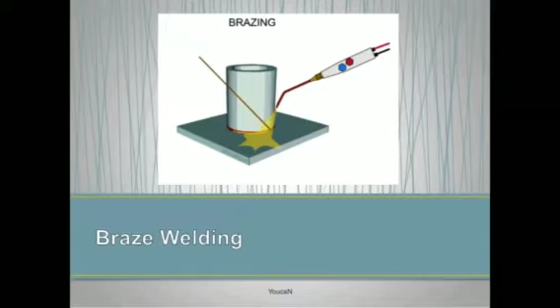So today our topic is brazing. Let us move to our topic. In our earlier class, we discussed soldering. So what is meant by braze welding? This is the brazing diagram, the braze welding outline diagram. In depth we will move for brazing.

Soldering means we are having below 427 degrees. So already we have started with our earlier class on the same topic. For braze welding, the filler metal melting point: in soldering, the filler metal melting point is below 427 degrees centigrade, whereas for brazing, filler metal melting point is above 427 degrees centigrade. The filler metal distribution in the joint is only by capillary attraction. This is the main working principle of our brazing.

The filler metal distribution in the joint is only by capillary attraction. So it differs from conventional brazing as compared to the other one. In conventional brazing, a much wider gap is filled with brazing brass with the help of a torch. Here, capillary action plays no part in making the joint.

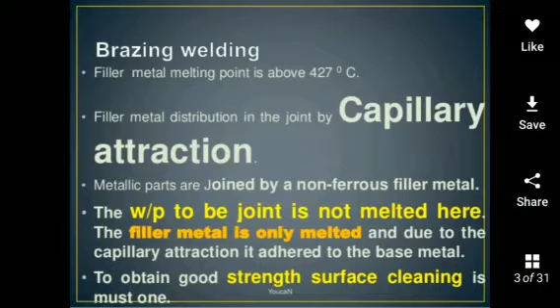The method is particularly useful for repairing cast iron castings, and the straight welding of the casting requires complete preheating, which is not always desirable or feasible. The brasses and bronzes we have taken have greater strength and ductility than cast iron.

This is the actual hand torch brazing. It forms a strong and satisfactory bond with the base metal. Since the base metal is not fused or highly heated, internal stresses are kept to a minimum and cracking is not likely upon cooling.

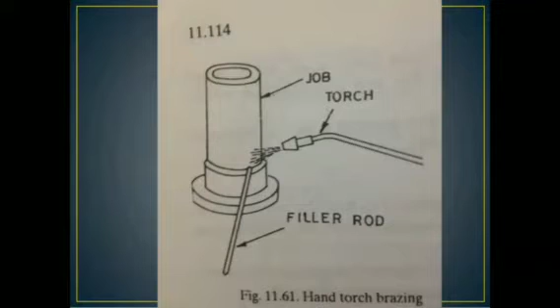Coming to silver brazing, this is the outline diagram of brazing. Silver brazing, often referred to as silver soldering or hard soldering, is more expensive than plain soldering because the filler metal is more expensive.

The method is preferred where a superior joint is needed and where the quantity of filler metal required is small. It is very popular in small area repair work and is used widely in the electrical and refrigeration industries.

On screen we have shared a flux. What about the flux? Flux is a chemical compound applied to the joint surfaces before brazing. Its use is essential in the brazing process, with a few exceptions noted later.

The reason we use this is that heating a metal surface accelerates the formation of oxides, which result from the chemical combination between the hot metal and the oxygen in the air.

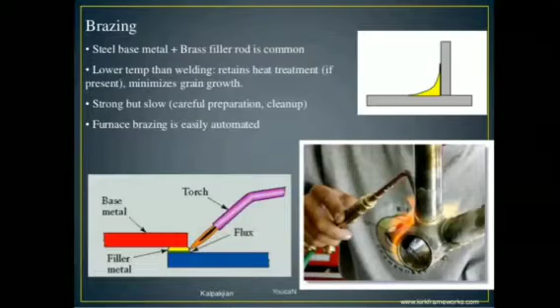Coming to brazing: the base metal is steel, and the base metal plus brass filler rod is common. The second important point is lower temperature than welding, that is above 427 degrees centigrade.

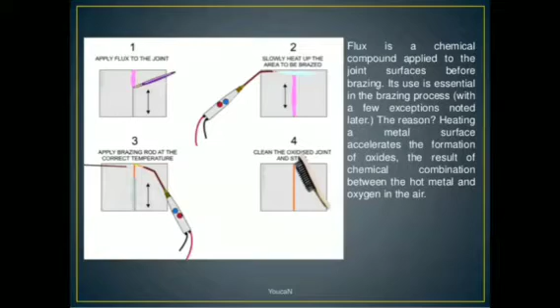Retaining heat treatment, if present, minimizes grain growth. The joint is very strong, but the capillary action is slow. Therefore careful preparation and cleanup must be done using flux, a chemical compound applied to the joint surfaces before brazing. That is nothing but the cleanup operation.

The last important point in brazing is that furnace brazing is easily automated. This is the diagram: flux, torch, base metal, and filler metal. The yellowish color we see in the diagram is filler metal, and the reddish color is base metal. What is the base metal we have taken here? Steel. And the blue is the other metal.

So two different metals have to be joined. The flux is added on the surface of the base metal, and the torch gives the temperature so that the gap reaches above 427 degrees centigrade. Therefore the melting point may be achieved, since the melting point of the filler metal is above 427 degrees centigrade.

With that low temperature we can get a strong joint, but it is very time-consuming compared to soldering or other welding processes. Furnace brazing is easily automated.

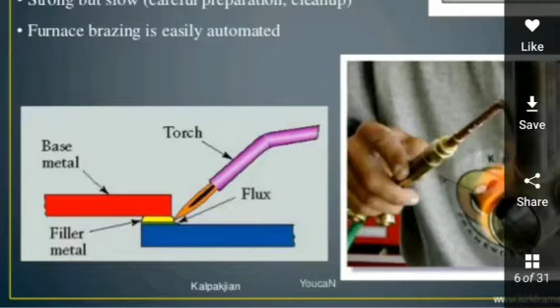Coming to the types of brazing: torch, furnace, dip, and induction. These are the types of brazing - torch brazing, furnace brazing.

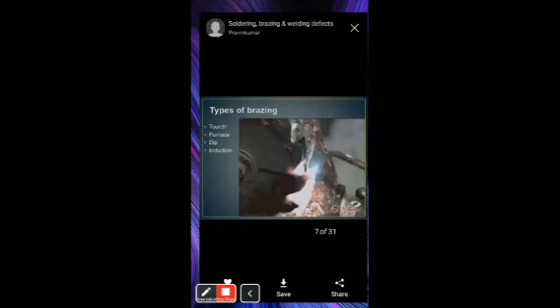Right, so coming to this, these are the types. So this is the brazing. Base metal is steel and brass is the filler rod metal.

So whenever soldering, what is the filler metal? Lead and tin. According to brazing, the base metal is steel, as the melting temperature is above 427 degrees centigrade.

So at that temperature, we can make the brazing joint. Before coming to this, here you can observe the diagram. So what is going on here? This is one metal and this is the base metal, the upper one, and this is the torch.

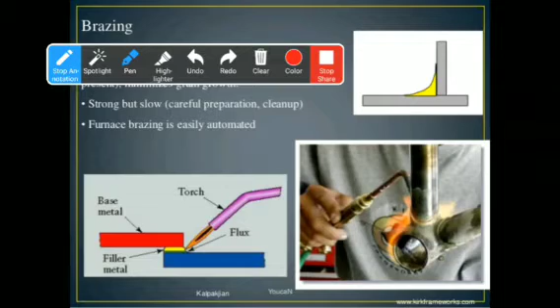Here we are adding flux, and the yellow color one is the filler metal. So the metal may be melted to some extent, and therefore it may be fused together and the joint may be formed, as compared to other welding processes. It is a slow process, but certain care must be taken for this process.

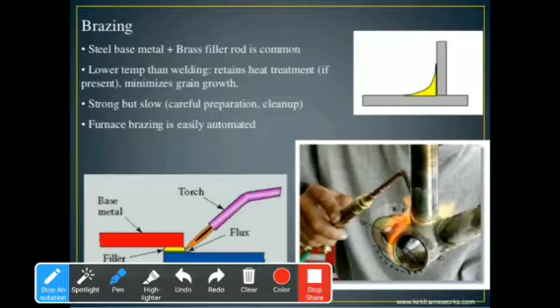So coming to the types of brazing: one is torch brazing, second one is furnace brazing, third one is dip brazing, and fourth one is induction brazing. These are the types of brazing.

Everybody must just remember that anytime in our welding process, brazing and soldering is a very important topic. Anytime in this welding process, either oxyacetylene welding or this type of soldering, these codes are very, very important. If any questions are asked, all of you just prepare yourself using this PPT shared.

So coming to the types of brazing, the picture is loading, just wait a minute. The net is very slow today.

Yeah, so right, so braze welding. This is the braze welding for metal. And boric acid, chlorides, fluoxides are some of the fluxes we have been adding. Why are we adding? To clean up the surface of the base metal.

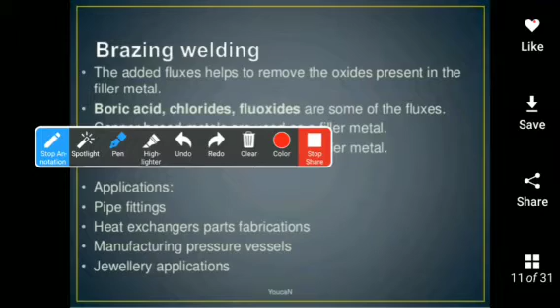So brazing applications - all of you, any mechanical engineer must know about the applications. These are the applications on screen we have shared. One is pipe fittings, second one is heat exchangers, parts of fabrications, and third one is manufacturing pressure vessels.

It is very slow. So this is the applications.

So brazing welding: first one is it is at low temperature, a low temperature process; second one, dismantling of joints is possible; it is a quick and clean action; and the last one, smooth surface finish can be obtained. So these are not the applications, these are the advantages. Every process must contain construction, working principle, advantages and disadvantages.

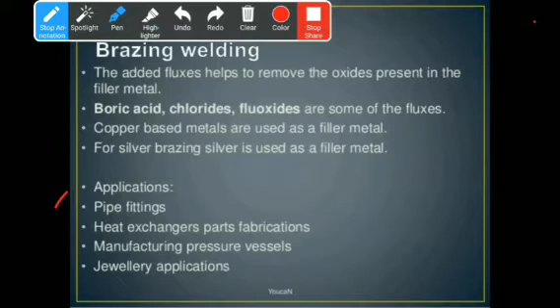So coming to that, applications are pipe joints and others. These are all the applications we have shared. Total 4 applications of brazing, whereas for this we have a total of 4 advantages also.

One is low temperature process, and second one is dismantling of joints is possible - that is, cutting operation is also possible using this braze welding. Third one is quick and clean operation, and fourth one is smooth surface finish can be obtained.

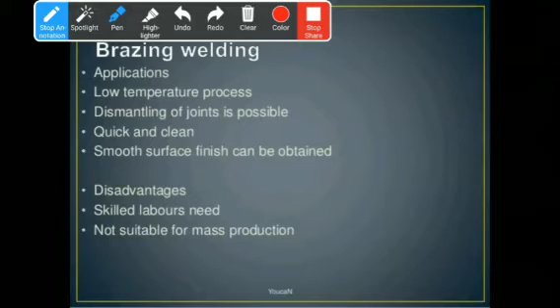So coming to the disadvantages: skilled laborers must be required, a skilled worker, skilled operator must be required. And the next one is not suitable for mass production - a number of products cannot be joined using this brazing; it's a very slow process.

So coming to this is the soldering. Here you can observe, this is the soldering, this is the solder, this is the wire form of lead and tin, filler metal.

It gives the temperature below 427 degrees, therefore here the filler metal may be melted and the joint may be formed here. Soldering means it will create a narrow joint also, that means it will create the temperature up to the lower surfaces of the workpiece.

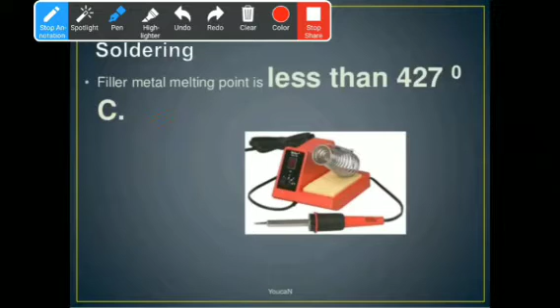So this is the soldering. We can observe it in our ECE lab or mechanical labs also. Filler material melting point is less than 427 degrees.

So this is the solder filler metal alloys, already we have discussed this. One more time I am sharing this: alloys of tin and lead. So alloys of tin means it may be subdivided into silver, bismuth and lead. The melting point is below 430 degrees centigrade.

So here the flux used to clean the joint and prevent oxidation - zinc chloride, mixtures of zinc chloride and ammonium chloride.

Coming to the applications: printed circuit board manufacturing. Wherever the ECE labs are, you can observe the soldering. Second one is pipe joining, specifically copper pipe joining, where the material of that particular pipe is copper. Third one is jewelry manufacturing.

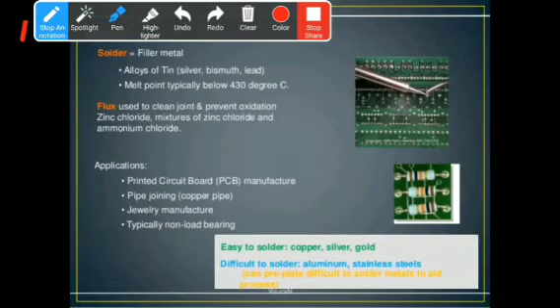Fourth one is typically non-load bearing. Here it is easy to solder, meaning the base materials may be copper, silver, and gold. Difficult to solder materials, where we have certain difficulties, are aluminum and stainless steel. Whereas for brazing, stainless steel is the base metal, for soldering, stainless steel is a difficult material to join.

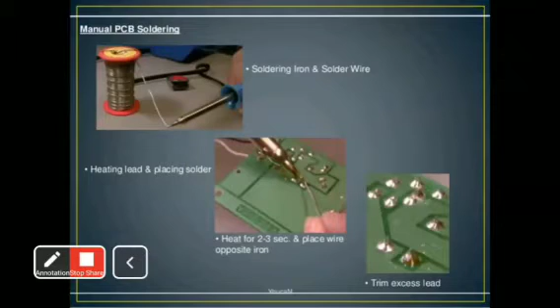Coming to manual PCB soldering: soldering iron and soldering wire, you can observe here. This is the soldering iron and this is the soldering wire.

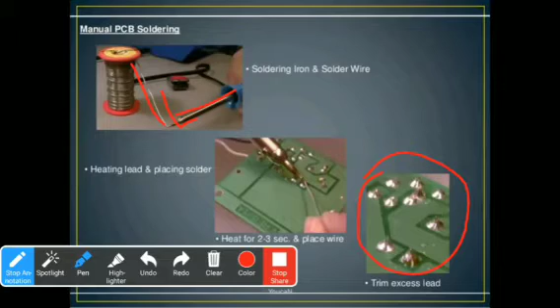Coming to the difference between brazing and soldering.

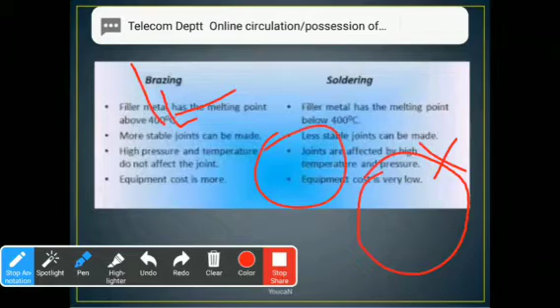Filler metal has the melting point above 400 degrees, 327 degrees.

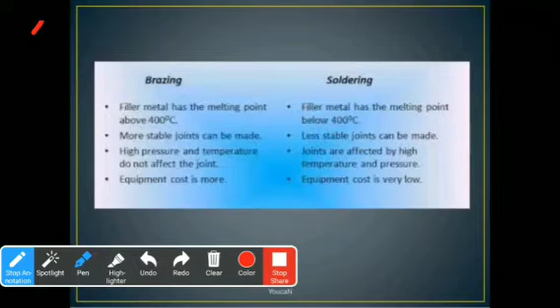So these are the main classifications in brazing and soldering. Coming to the defects: one is cracks, second one is cavities - these are all the defects in our brazing and soldering.

Coming to the defects: one is cracks, second one is cavities, third one is solid inclusions, fourth one is imperfect shape or unacceptable contour, next one is incomplete fusion, and another is miscellaneous defects. These are all the welding defects that may be obtained by improper soldering and brazing.

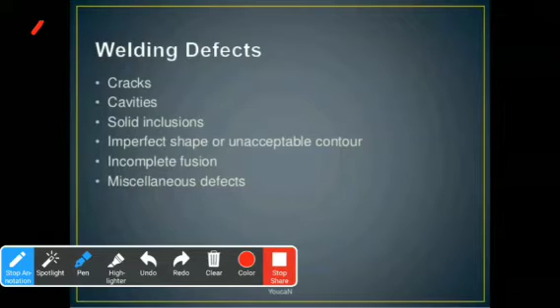To avoid all these things, we can manage. Coming to distortion from the welding process: one is transverse shrinkage in butt weld, second one is longitudinal shrinkage in butt weld, third one is angular distortion in butt weld, and fourth one is angular distortion in fillet welds.

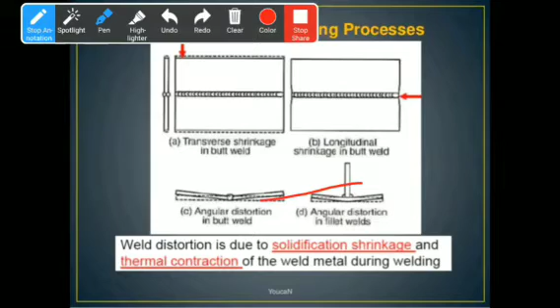Weld distortion is due to solidification shrinkage and thermal contraction of the weld metal during welding. All of you should just know about the different types of distortion from the welding process. This is the angular distortion.

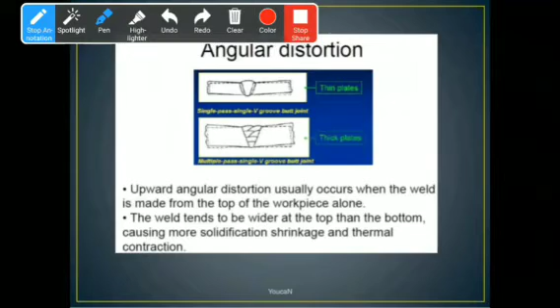Upward angular distortion usually occurs when the weld is made from the top of the workpiece alone, and the weld tends to be wider at the top than the bottom, causing more solidification shrinkage and thermal contraction. This is reduced by reducing the volume of weld metal, and by using single pass deep penetration welding - the diagram itself can be drawn, as it is drawn in machine drawing also.

To avoid this - these are the causes we are attaining the defect - whenever we require defect-free welding, we will provide a certain atmosphere for that. Prevention: how to prevent this defect is to set the machine on scrap metal and clean metal before welding. Clean metal means removing rust, whatever surfaces may be created.

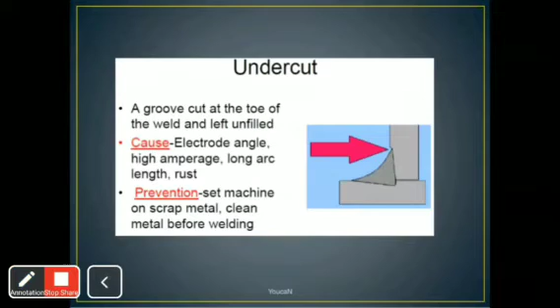So prevention: set machine on scrap metal, clean metal before welding. Coming to this, insufficient fill is one of the defects we attain.

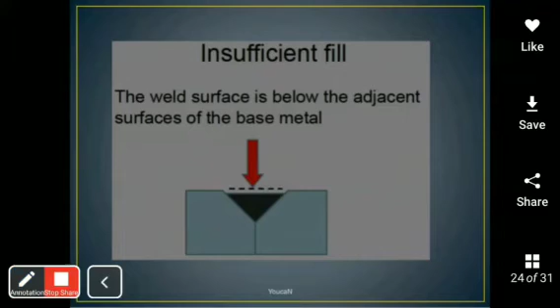All these defects may be discussed in our casting also. The weld surface is below the adjacent surfaces of the base metal. This is one of the defects - insufficient fill.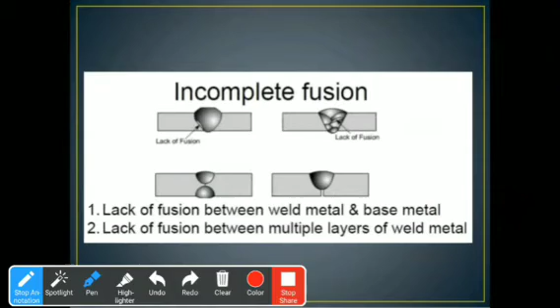Lack of fusion between weld metal and base metal, and lack of fusion between multiple layers of the weld metal - these are the two reasons for attaining this incomplete fusion. This is the cause.

Weld metal does not form a cohesive bond with the base metal. Cause is low amperage, steep electrode angles, fast travel speed of the wire, and lack of preheat, etc. So how to prevent this - eliminate potential causes.

The repair means remove and re-weld. Repair means how to repair this - prevention and repair. So therefore prevention is elimination, complete removing of potential causes, and repairing means removing and rewelding. This is about incomplete fusion.

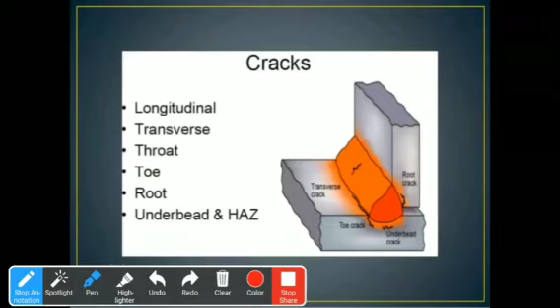So these are the cracks we are attaining: longitudinal, transverse, throat, toe, root, underbead, and HAZ. All of you just have a look at it. This one is the crack.

Second one is transverse, in this way. Third one is throat. This is throat or root, both are same. This is the throat.

Second one is underbead crack and HAZ, because this crack is mainly attained by improper cleaning. The toe means at the end point - at the end point we will attain it. These are the different types of cracks.

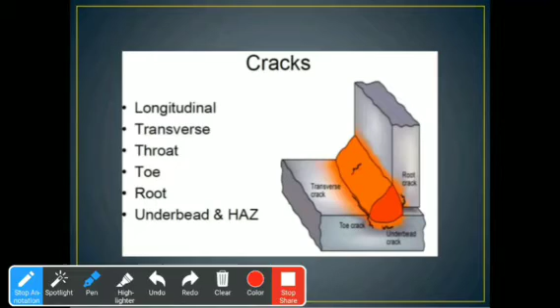These are attained by improper soldering and brazing. So weld profile in arc welding: this one is the desired profile for a single V groove weld joint. Second one is undercut - portion of base metal melted away.

Third one is underfill - depression in weld below adjacent base metal surface. Fourth one is overlap - weld metal spills beyond the joint onto the part surface, but no fusion occurs.

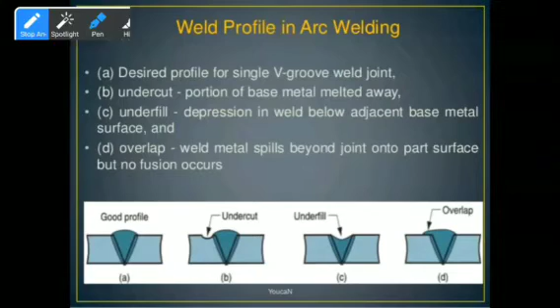So these are the weld defects we will attain: one is crack - internal crack, second is inclusions, and third is underfill. That means it is not filling the total gap.

So second one is porosity, overlap, undercut, and lack of penetration. The third one is the correct weld. These two are not correct - this is the correct weld.

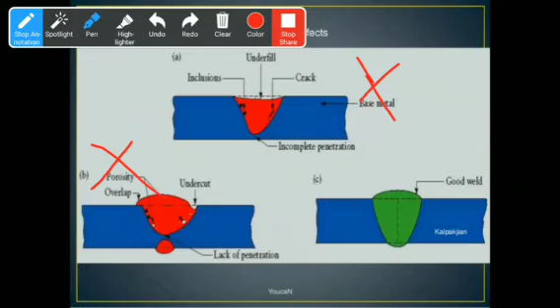So why it is attaining incomplete penetration first, and second is lack of penetration. To avoid this, the measures we have to take, we have already discussed.

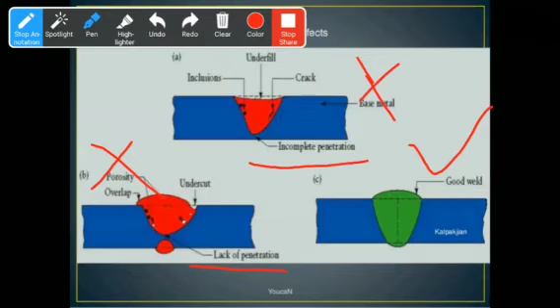So this is the good weld, right? This is the welding flaws. Incomplete penetration - not enough heat may be produced, so this is not enough, this is okay, and this one is too much.

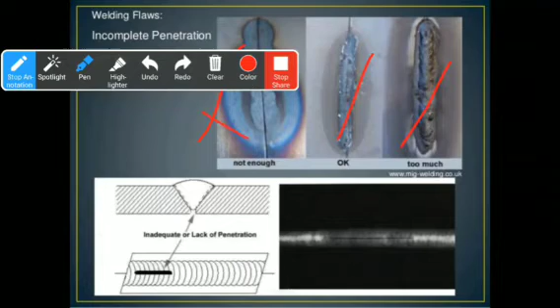That means overflow of filler metal may be melted and flowed onto the base metal. So what is the right procedure? Not enough is not correct. Too much is also not correct.

So this is the right one - that means correct bead position may be obtained. So inadequate or lack of penetration we will attain in this way.

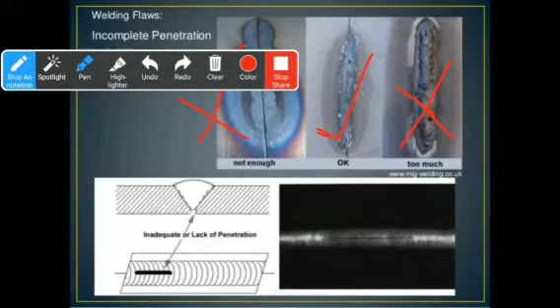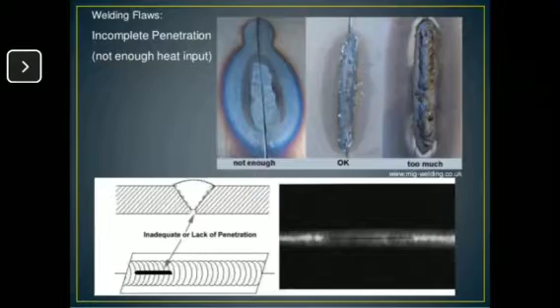So coming to the welding process, brazing and soldering. Coming to the next one, we are having the next one - resistance welding.

Coming to this, here this is the resistance welding. This is the resistance welding.

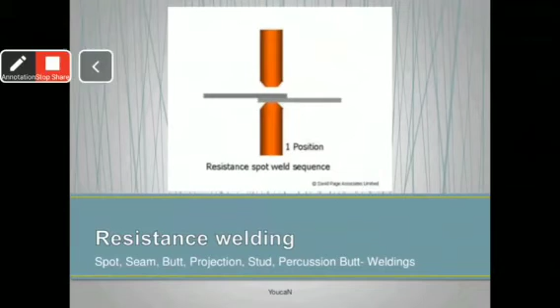The two pieces - the same equipment is used for resistance welding also, excepting the filler material is placed in the joint. That's why I'm sharing resistance welding at the same point here.

Coming to the different types of brazing methods, we have totally 4 types: torch brazing, furnace brazing, dip brazing, and resistance brazing. So resistance brazing is nothing but resistance welding.

So this is the position of the resistance spot welding process. Here the same equipment is used for resistance welding. What is the equipment? Brazing equipment, excepting the filler metal is placed in the joint. The filler metal is placed in the joint, so rapid heating minimizes oxidization.

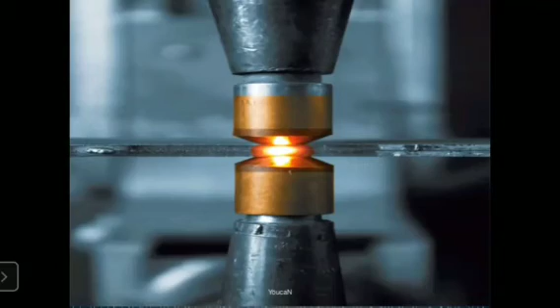Rapid heating minimizes oxidization, and the heat affected zone, HAZ, is small. So this is the resistance welding process. Resistance welding is one of the oldest electric welding processes used by manufacturing industries today.

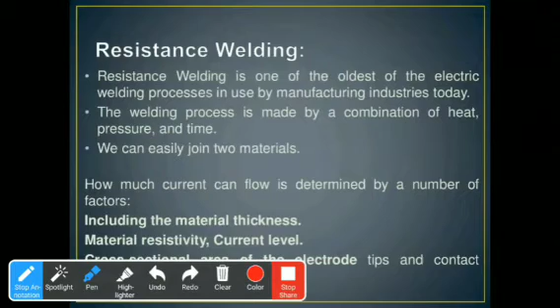The welding process is made by a combination of heat, pressure, and time. We can easily join two materials, and how much current can flow is determined by a number of factors: material thickness, material resistivity, current level, and cross section of the electrode tips and contact surface.

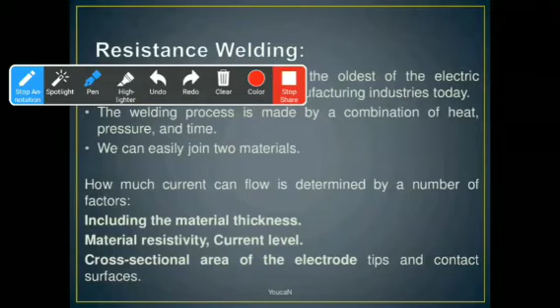The current may be passed at that particular point. The copper electrodes will give a spot welding - resistance spot welding may be applied for brazing, both are similar. This is resistance welding. The coalescence is produced, meaning the workpiece is joined with each other - the metal is melted at that particular point.

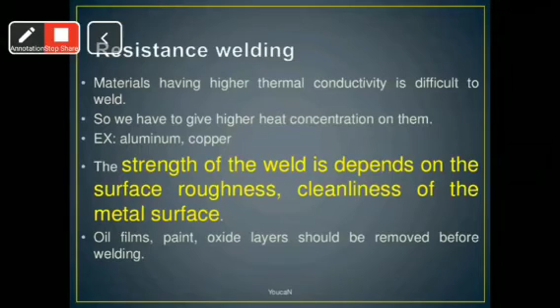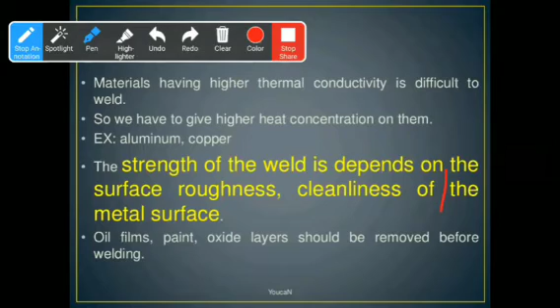These are the resistance welding materials - aluminum and copper are commonly used. Materials having high thermal conductivity are difficult to weld, so we have to give higher heat concentration on them. The strength of the weld depends on the surface roughness and cleanliness of the metal surface. Oil films, paint, and oxide layers should be removed before welding - this applies to brazing as well.

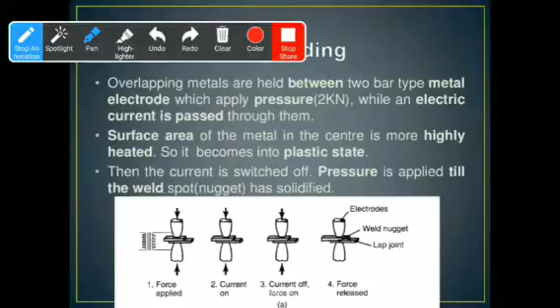Coming to resistance spot welding: overlapping metals are held between two bar type metal electrodes which apply pressure of 2 kilonewtons while an electric current is passed through them. The surface area of the metal in the center is highly heated, so it becomes a plastic state. Then the current is switched off, and pressure is applied until the weld is complete.

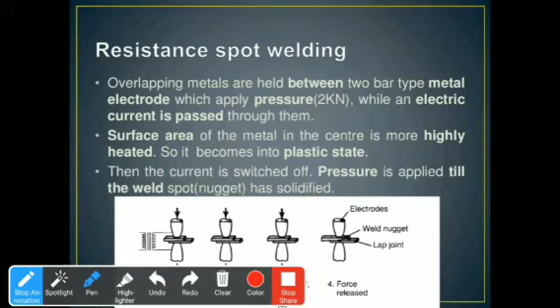What is the equipment? Two copper electrodes, the base metal, and the nugget. Here we call spot welding also as nuggets.

At a particular point, we call it a nugget. Pressure is required either way, and the current is passed through the electric circuit.

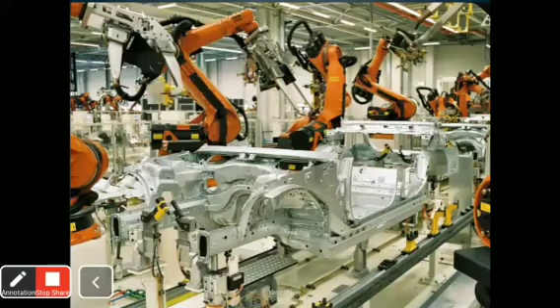This is spot welding, actually happening in our manufacturing industries. Robots also perform spot welding within a single time. The spot diameter depends on the electrode diameter, 3 to 6 mm. The electrode must have good electrical and thermal conductivity, and electrodes are cold rolled copper with some cadmium chromium alloys. To prevent overheating, electrodes use 10000 ampere current for steels and 13,000 ampere current for aluminum.

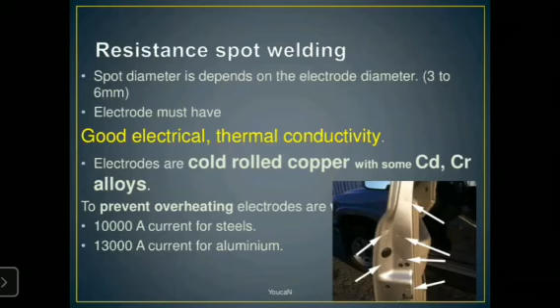This is resistance spot welding applications: 8,000 to 10,000 spots in a single car. Second is cookware applications. Third is railways and train building. Fourth, spot welding is restricted to 3.2 mm thick steel and 4 mm thick aluminum.

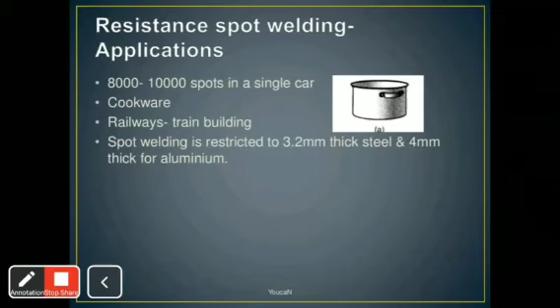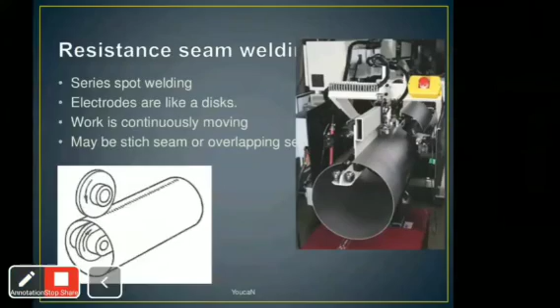So this is the resistance seam welding description. This is cold rolled copper with some cadmium chromium alloys. Electrodes are 40 to 350 mm diameter, and the current is 2000 to 5000 amperes.

The force may be 5 to 6 kilonewtons, and the speed of the workpiece is 0.5 to 3.5 meters per minute. Water stream is directly used to cool the electrode, and 0.25 to 3.2 mm thickness joint can be made. This is the thickness range, minimum value 0.25 mm and maximum value 3.2 mm.

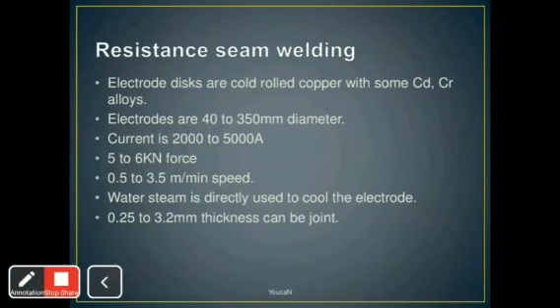So the resistance seam welding applications are only for tanks, tubes, and airtight joints.

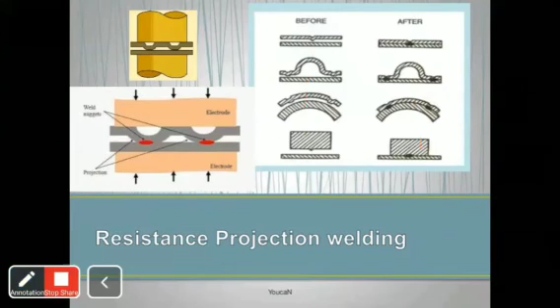Resistance projection welding is like a spot welding machine, but here a series of spot welds is done at a time. Small dimples or projections are embossed or coined on one of the sheets. When the current is applied, the projections soften and are pushed back in place by the electrode pressure as the weld spot, which is called a nugget.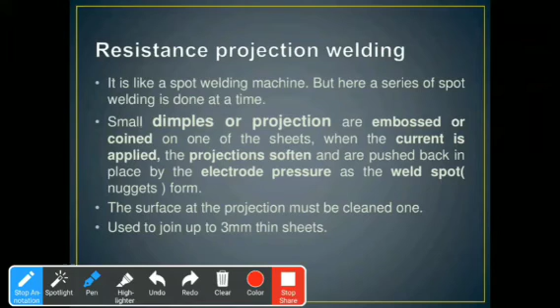The surface at the projection must be cleaned, and this is used to join up to 3 mm thin sheets. So this is the projection welding.

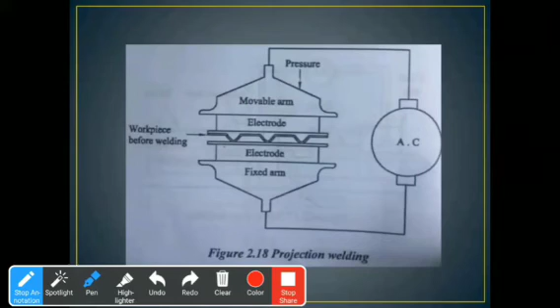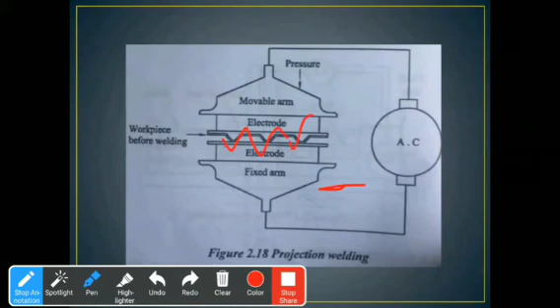This is also the same as in seam welding or spot welding. But with projections, the workpiece width may be increased. Here you can observe that the projections may be obtained in a single pass.

Coming to this, electric arc is produced between the flat surface and the workpiece and the stud. The arc melts the end of the stud, and the stud is forced onto the work surface. A special welding gun is used.

It contains spring, solenoid, trigger, timer, etc. To avoid oxide formation, the front end of the stud is coated with flux. A special welding gun is also used, right?

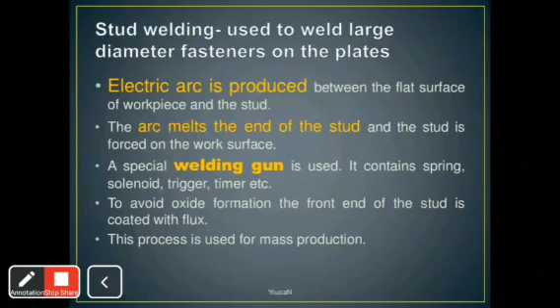This process is used for mass production. So this is the stud welding diagram, line diagram.

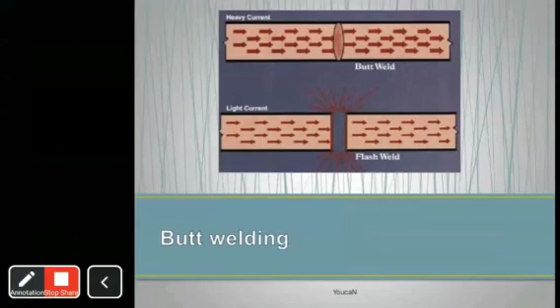So all of you just keep in mind, for every process you have to draw the line diagram. Then only you will get the complete marks. I will share it after some time.

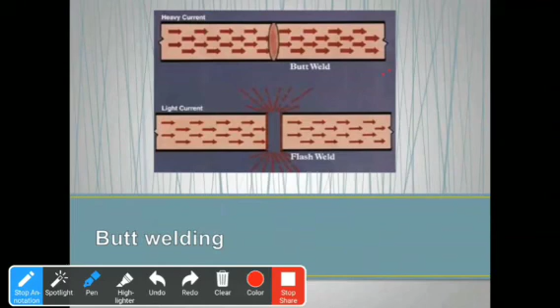So this is the butt welding. Butt welding means, as you already drew in your machine drawing, two different metals are placed together and joined. Then we call it a butt weld. Butt welding may be subclassified into upset butt welding and flash butt welding.

At this point, the applied pressure upsets or forges the parts together. This process is mainly used for joining non-ferrous metals such as rods, wire, tubes, etc.

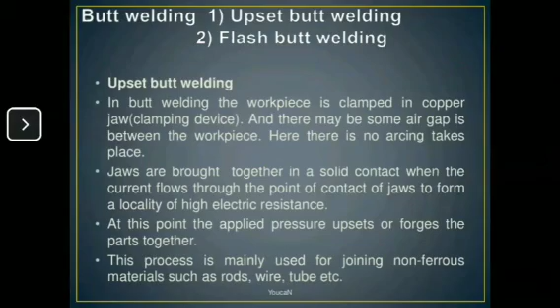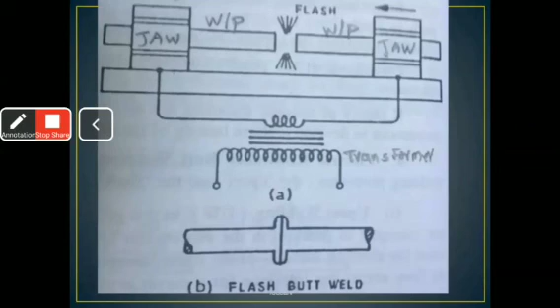So this is the flash butt welding line diagram. These are the two jaws, and these are the two workpieces fixed together, where the flash may be attained in between. This is the transformer where the heat may be produced.

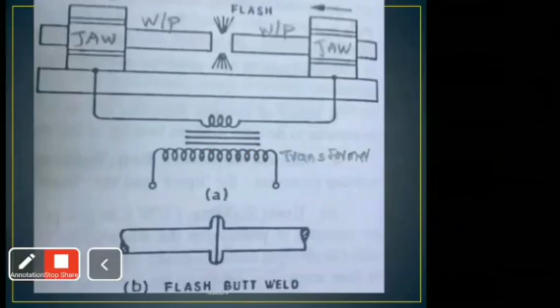Coming to percussion welding, we will discuss it in our next class. If you are having any queries, please ask me.